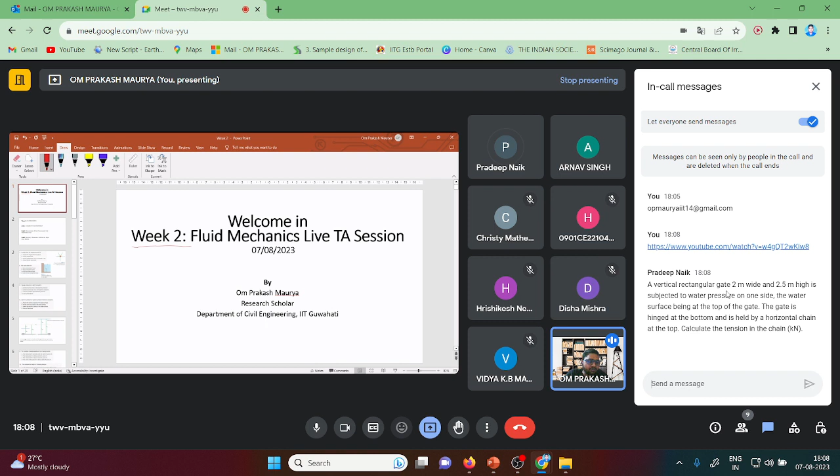Welcome all to the week 2 fluid mechanics session. The first lecture was about the concept of hydrostatics, the second lecture was about the measurement of fluid pressure and fluid hydrostatic force, and the third lecture was about buoyancy, metacenter, stability and rigid body motion. So we'll move on to the first question.

Before we move on to the first question, let me discuss some basic concepts of fluid statics. First, I want to discuss Pascal's law. Before going to Pascal's law, I want to discuss some concepts. So I think my slide is visible to all of you. Yes sir. Yeah, okay, thank you.

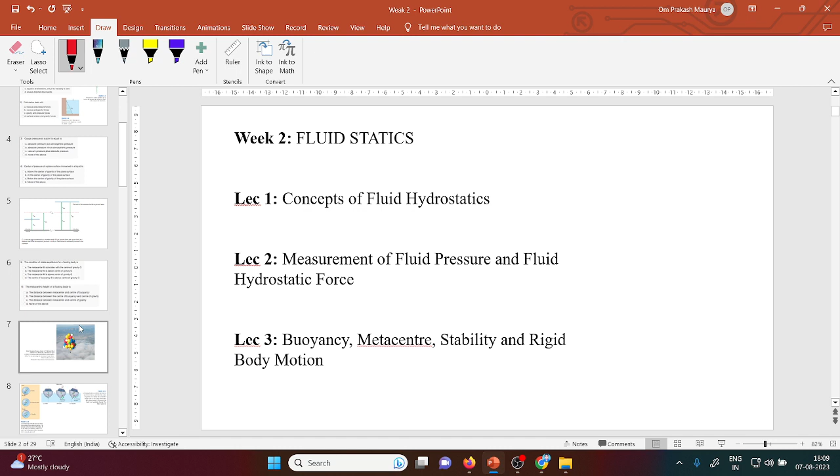I think I have given some figure about it. Yes, this figure is visible to all of you.

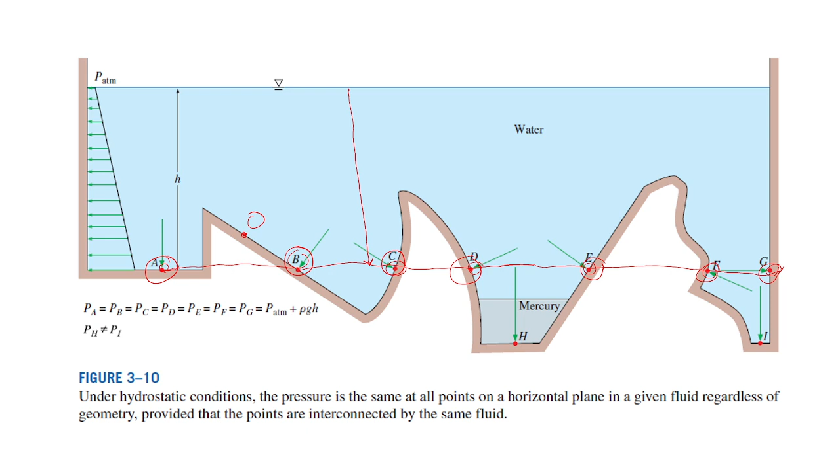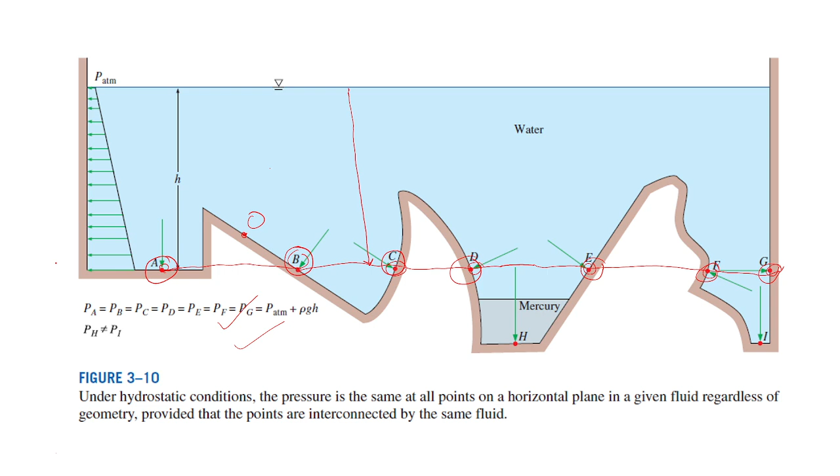Sir, your cursor is not visible. Oh, not visible. The figure is visible sir, but what you are marking is not visible. Oh, why is this happening? Wait. Now? No sir, not yet. Your cursor movement is not visible. Okay. Yes, now it's visible, point B, C. Okay, okay.

Let me put it in this mode. I think in full view mode the electronic pen is not working. So let me discuss in this mode. So point A, point B, and point C. This is very important for hydrostatics, and at the end of this concept discussion, you will get some feel about how to design these hydrostatic instruments.

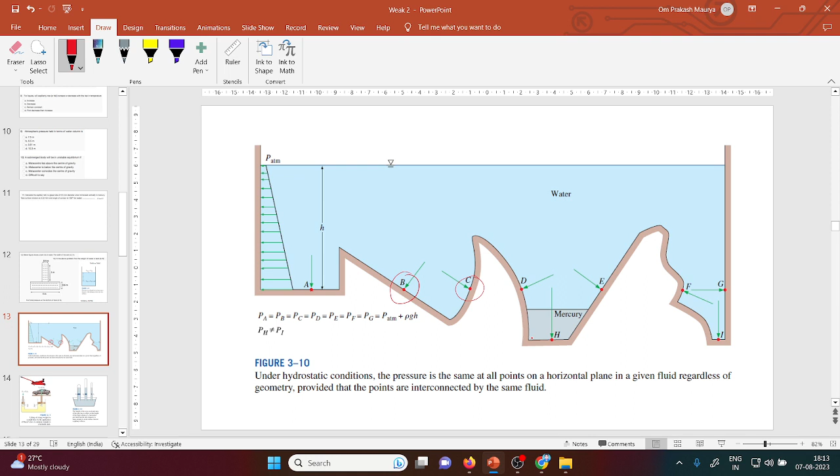So let's discuss. Point A, point B, point C, point D, point E, F, and G. These all points are in the same horizontal plane, at the same horizontal line. When you measure the pressure at point A, if you know the pressure at A, then there is no need to calculate the pressure at any point. As per the concept of hydrostatics, there is a derivation for that. Here I will not discuss the derivation. For point A, point B, point C, point D, at every point the pressure will be same, because it is the same fluid everywhere.

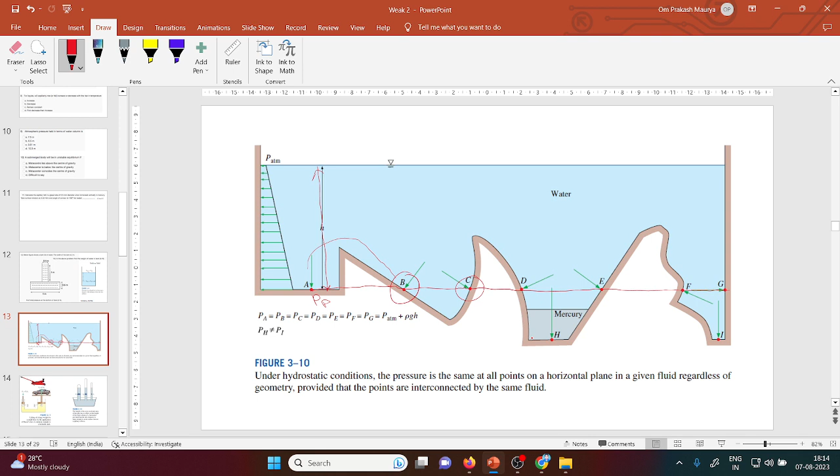But see here the below one, point H and point I. Point H and point I are at the same level, but pressure is not same, because here the fluid is mercury and here is water. So there are two conditions for pressure to be equal at two points. First, the fluid should be the same, that is the same density, and second, the points should be at the same level. So this is the main thing.

In that case sir, I will be different than F and G, is it not? Yes, here the level is different. At that level, if you draw the line, the height is that, right? Yes. But at point I, the height is different. So pressure is different. Different, yes. Right? Yes sir. Okay.

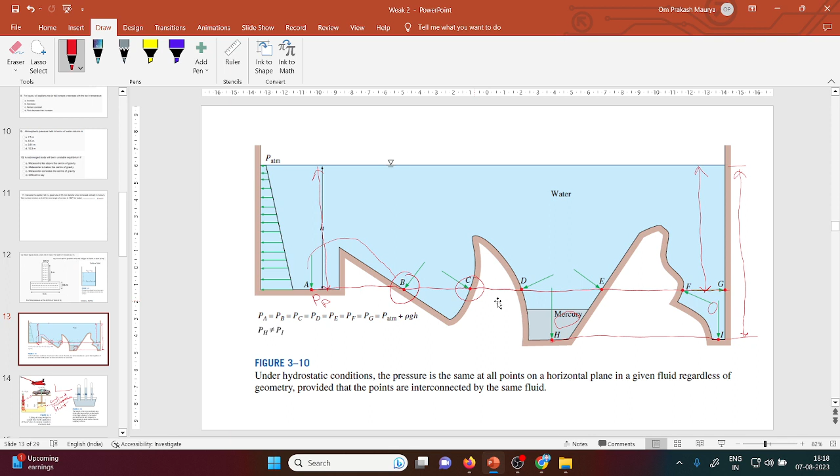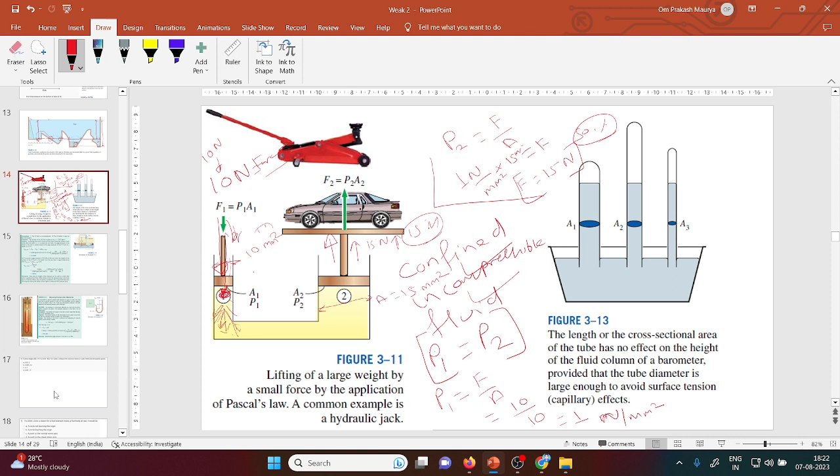Now, I don't know, and I think yeah, that is last.

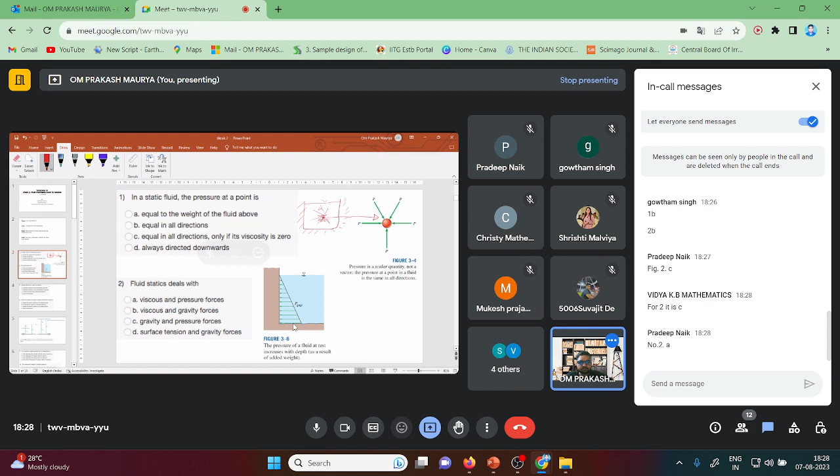Yes, now we'll discuss question number 2. I have given a figure here also, let's discuss. In fluid statics - actually someone is telling viscous, option number B is correct, someone is telling option number C is correct, the gravity and pressure force. Why? Because here we are talking about force, not viscosity - viscous force and pressure force and gravity force and tension force are the combinations given in the options. We are not talking here about viscosity. So let's consider this figure: the fluid is in a static condition, the fluid is not moving.

So there is a problem, yes, problem with the cursor. Hello, hello. Yes, oh sorry for that, I think network problem, sir you are not audible. Yeah sorry for that, I think some network problem from my side. Yes sir, audible, okay okay. Just I am sharing... yes, I think visible, my slide is visible, right? Hello? Yes, yes sir, yes yes sir, okay okay. Oh, my slide is visible to all of you? Yes. Oh but my side is not visible. Why not, okay let's discuss.

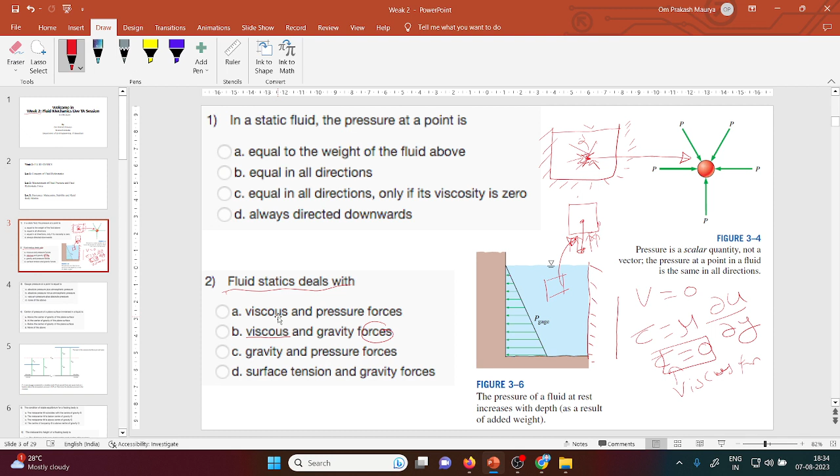Okay, let's move on to the third question. The gauge pressure at a point is equal to...

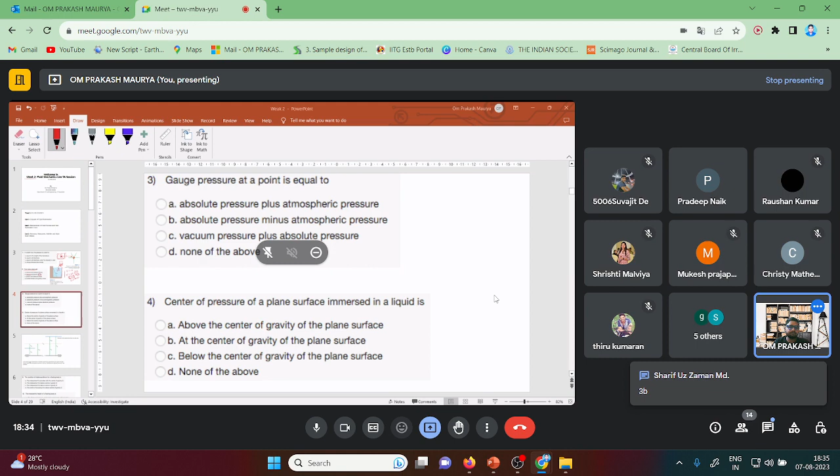For question number 3, Sharif is telling that option B is correct. Okay, let's see.

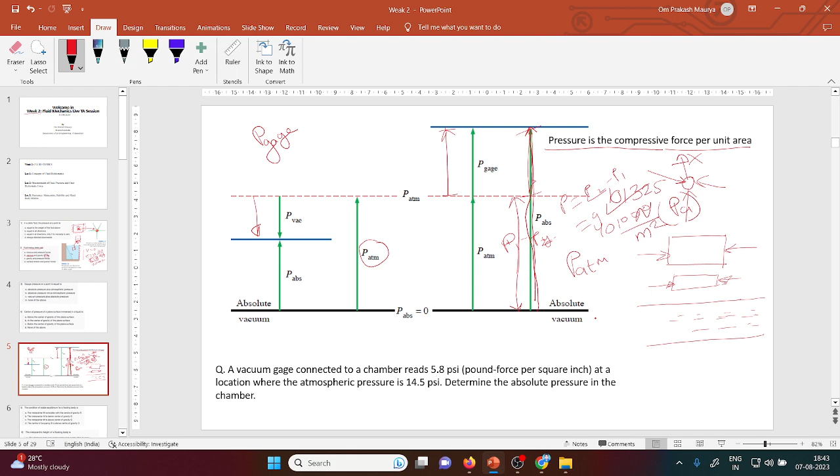Yes, your absolute pressure is from here to here, and here to here is the atmospheric pressure. Let's say this is P1 and this is P2. When you subtract, you get P2 minus P1. This quantity is the gauge pressure. With this length minus this length, you get this length easily. So the option B is correct. The absolute pressure minus atmospheric pressure.

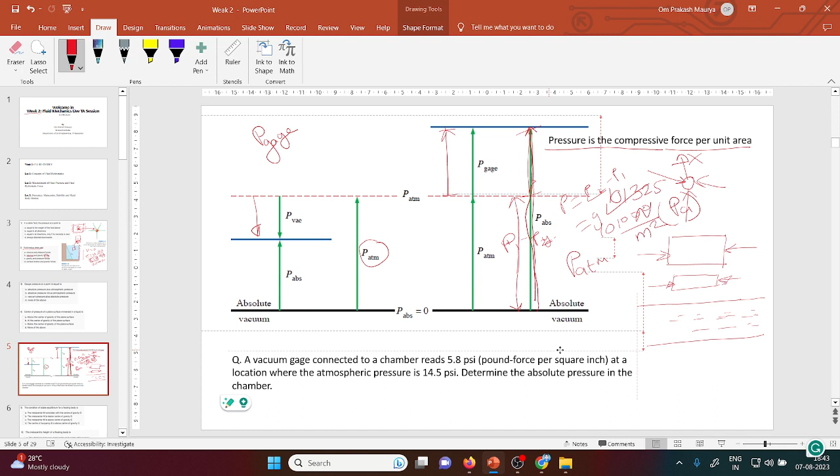One question is given based on that. Please solve this question first, then we'll go to question number 4. Is the question visible? Yes, sir. If not visible, I will increase the size. Now I think it's visible. Everyone please participate and write your answer in the chat box.

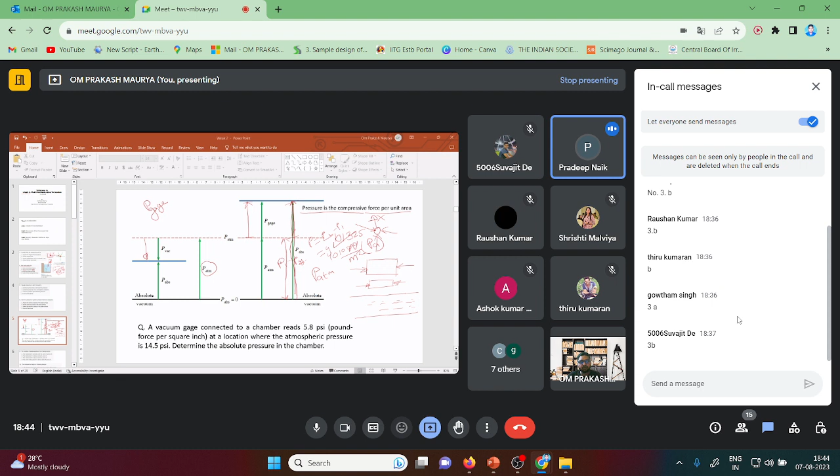The question is very simple. PSI is a unit of pressure, pound force per square inch. This is the English unit; like we use the SI unit, the English unit is also there. A vacuum gauge connected to a chamber reads 5.8 psi at a location where the atmospheric pressure is 14.5 psi. Determine the absolute pressure in the chamber.

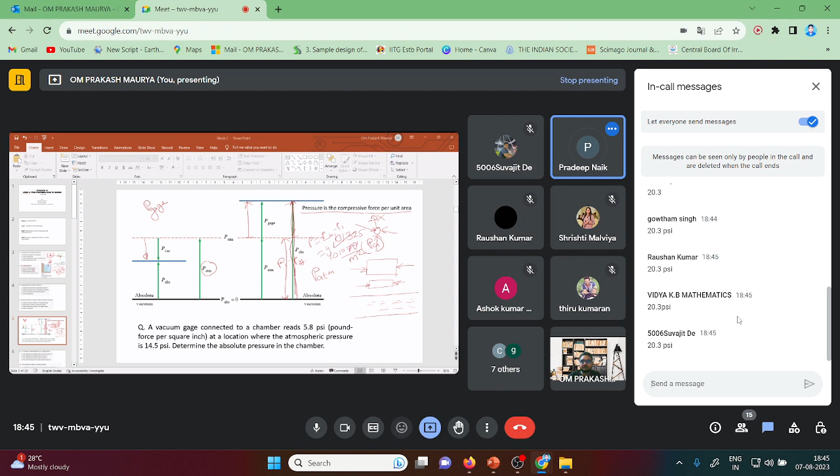Okay, 20.3. The gauge pressure is this much, and the local pressure is this much. Simply addition. Go through the figure concept I am telling you, and you can easily get it. 14.5 and 5.8, that is 20.3. Okay, fine.

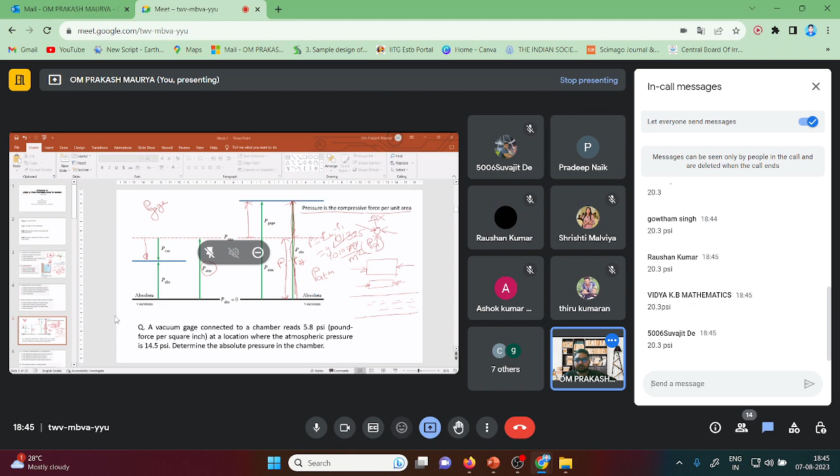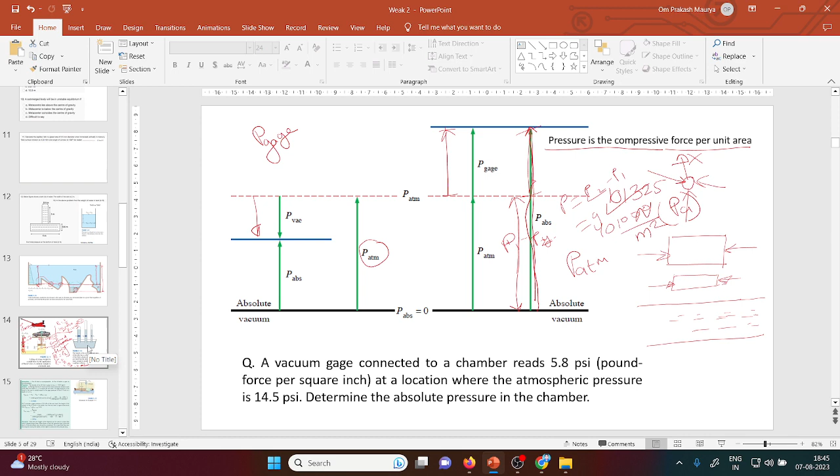Now I want to discuss some concepts about the barometer. I think the figure is visible to all of you, 3-13. The concept is the barometer. Forget about these two tubes and focus on only one tube.

Here is the atmospheric pressure, P atmospheric, and in this tube mercury, Hg, is there, and this is the vacuum part. When you put the barometer at any location, as your atmospheric pressure varies, the height of the mercury will increase or decrease. If the atmospheric pressure is lower than at another location, it will decrease; when it is higher, the mercury height will

increase. Using the concept of force balance, the gravity force balance, consider this length I am showing here. The weight, the mercury weight, is downward, and here the pressure is the atmospheric pressure, P atmospheric. So the weight is

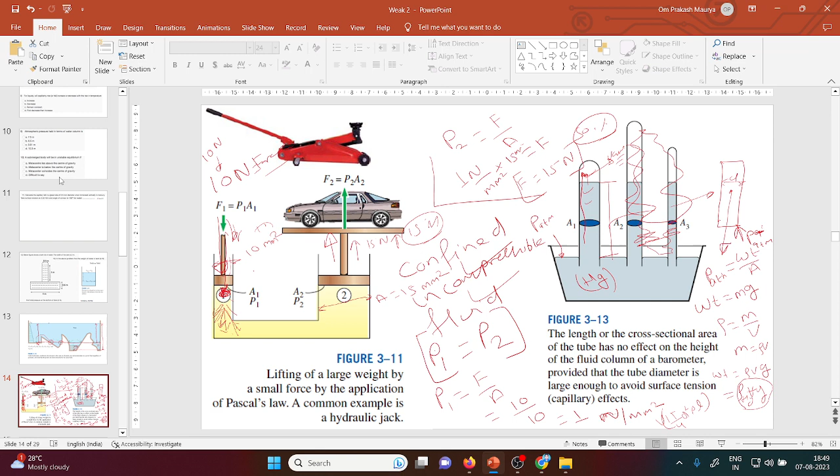With this concept, let's move on to another question. Not this. Yes, this question. Question number 4. I don't have a diagram for question number 4, but I think sir explained it very well in the lecture, so you can easily solve it. For question number 4, please everyone go through it.

Question number 4: the center of pressure of a plane surface immersed in a liquid is. It is talking about the center of pressure. As you all know, the center of pressure, center of gravity, and center of buoyancy. Option A is above the center of gravity of the plane surface. Option B is at the center of gravity of the plane surface. Someone is telling B. Option C is below the center of gravity of the plane surface, and option D, none of the above.

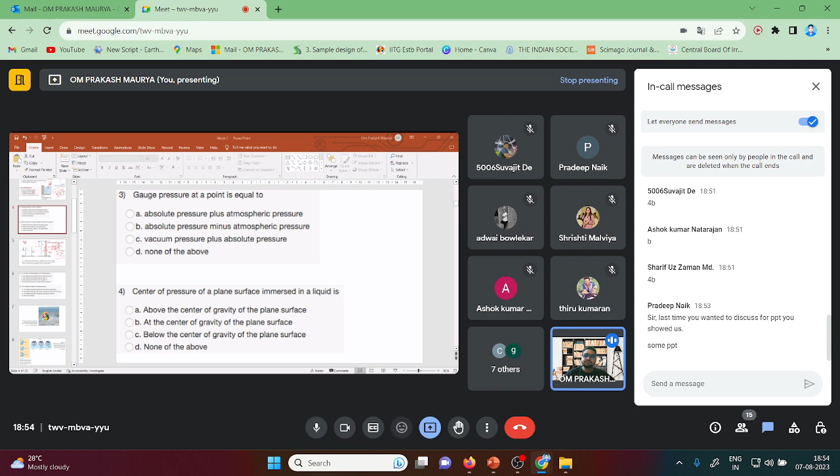No. The center of pressure is not exactly at the center of gravity. Someone is telling the answer. If fluid is there and you have immersed some body in the fluid, the center of gravity of the body is this. Let's say this is 4 meter, so the center of gravity is at 2 meter, and from here consider 1 meter, so the center of gravity from the top is 3 meter. That is G. But the question is about the center of pressure, which is how much pressure is acting on the body by the liquid. So the center of pressure is always below the center of gravity.

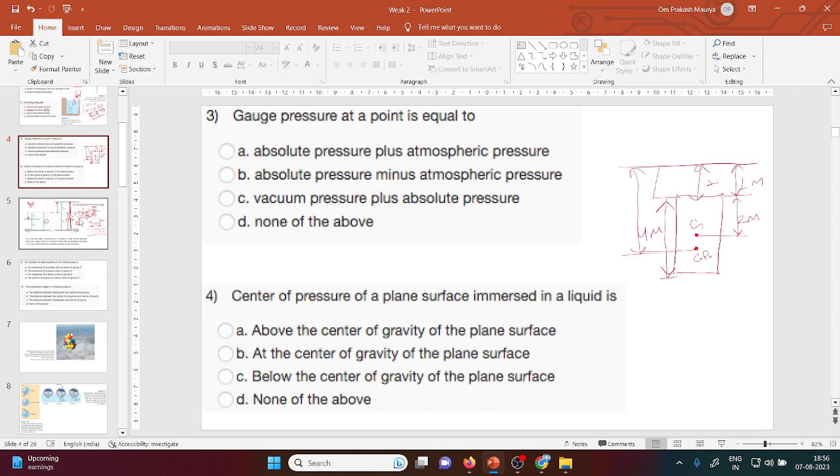For detailed knowledge, please follow the NPTEL lecture. You will definitely get some visualization of how the center of pressure is below the center of gravity. This is the center of pressure. Center of pressure is always below the center of gravity. So this question is discussed, and this one is also discussed. Question number 5.

Some metacentric height. Before question number 5, let's discuss some concept, then we'll go for questions 5 and 6. So what is metacentric height? Not metacentric height; here I want to discuss the buoyancy force. My slide is visible, I think? Yes, sir. Okay. You see someone hanging with these helium balloons in the atmosphere. This guy is hanging through the balloons. How? Only because of the buoyancy force acting on him.

Here is the description of what I was telling, but now come to that part. Let's consider one pond, a water pond, and this is the log. One dry log. Log means a piece of wood, and this one is the wet. When you throw both in this liquid, what will happen? The wet will sink completely, and the dry one will not sink completely.

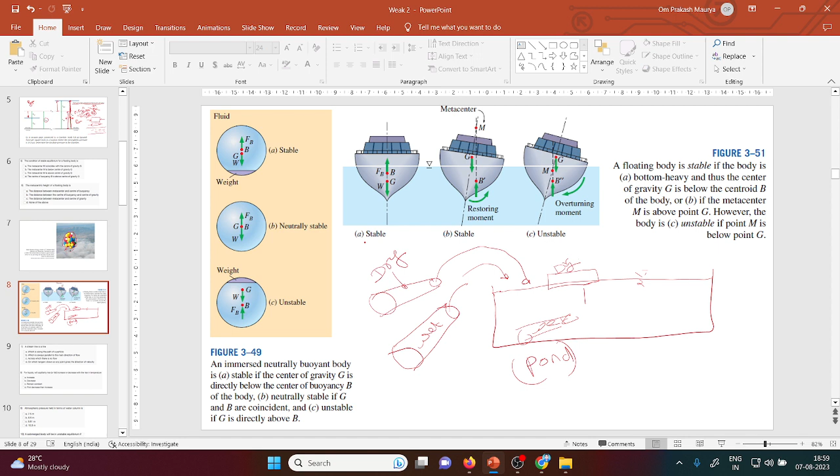Why? Because buoyancy force is acting, and the area, or you can say the volume, of both logs was same. Let's say volume is V meter cube. Volume of both logs was same. So the buoyancy force acting on that log and on that log will be same because the area will be same, but the density of your wet log is more as compared to the density of the dry one.

So what will happen? What is the density? M by V. Mass is how much? Rho V. And weight is how much? Rho Vg. Okay, rho Vg. When you just compare from here, rho of wet log is more as compared to rho of dry. So weight of dry log is less as compared to the weight of your wet log.

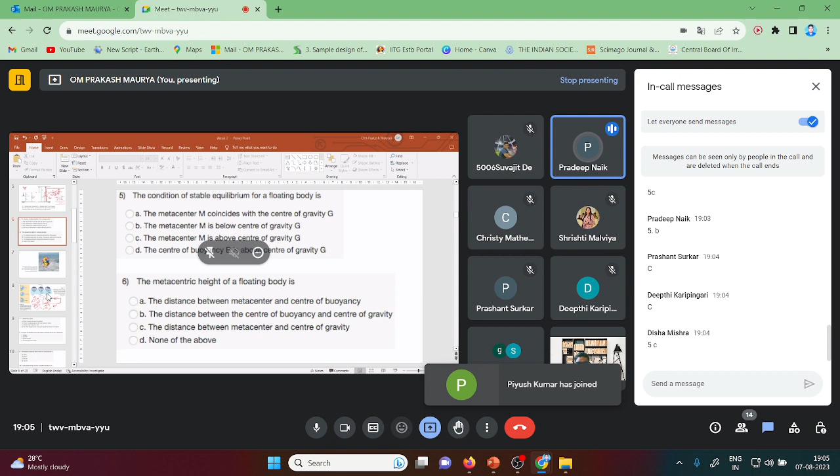Sir, can you please explain a little bit? Can you repeat that explanation you gave last time? Which one? The previous slide, sir. You were explaining what is metacenter and all. Yes, yes. Okay. Let's move to the PPT mode. Here the figure is given, figures A and B.

Yes, sir. You just see figure B, the metacenter here. This is figure B, the stable condition. The metacenter is here and your center of gravity is here. So for stable, the metacenter should be above the center of gravity. And in the unstable condition, your metacenter is below the center of gravity. I think it's visible to you, right? Yes. And the reason why the metacenter is above in the stable condition and below in the unstable condition,

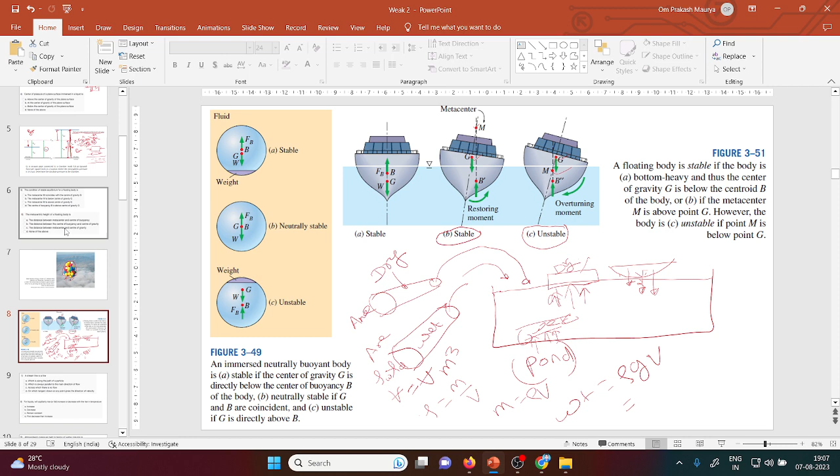Yes. Option C is correct. The metacentric height of a floating body is: the distance between the metacenter and the center of buoyancy, the distance between the center of buoyancy and the center of gravity, the distance between the metacenter and the center of gravity, and option D is none of the above. For this question, please everyone write the answer in the chat box.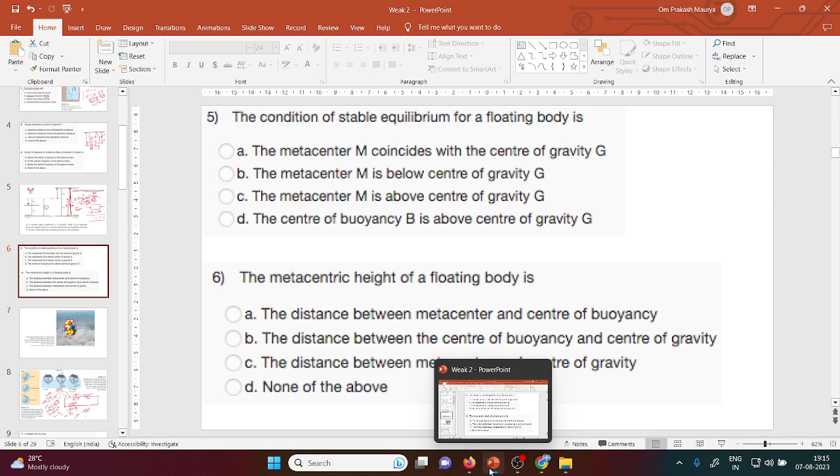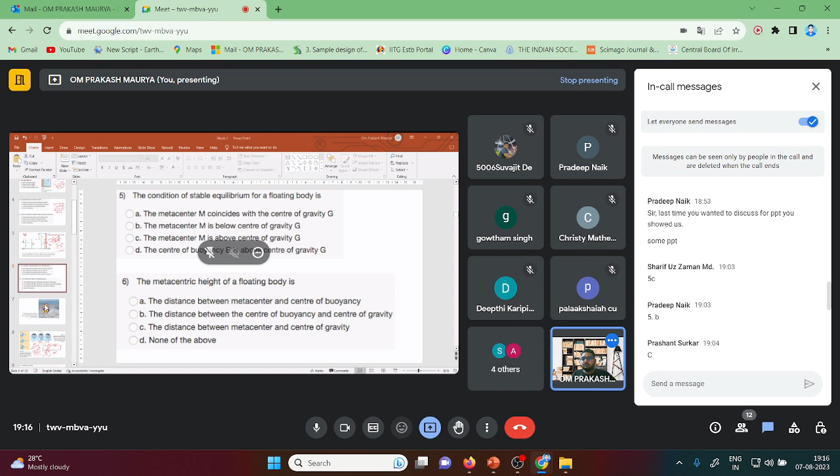Yes, for question number 6, option C is correct. Okay, this concept we have discussed, and this one also. Before going on to the above question, let's first discuss question number 9 and 10.

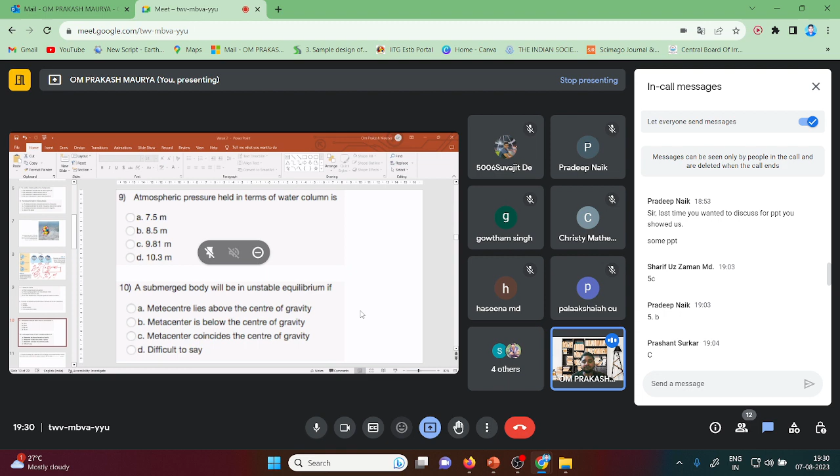Yes, am I audible? Please anyone tell. Yes, sir, audible. Okay. Are you solving the question? Okay, now I want to discuss the answer. No problem. I want to discuss on the new slide.

The question is telling this. You have a barometer with mercury, like here.

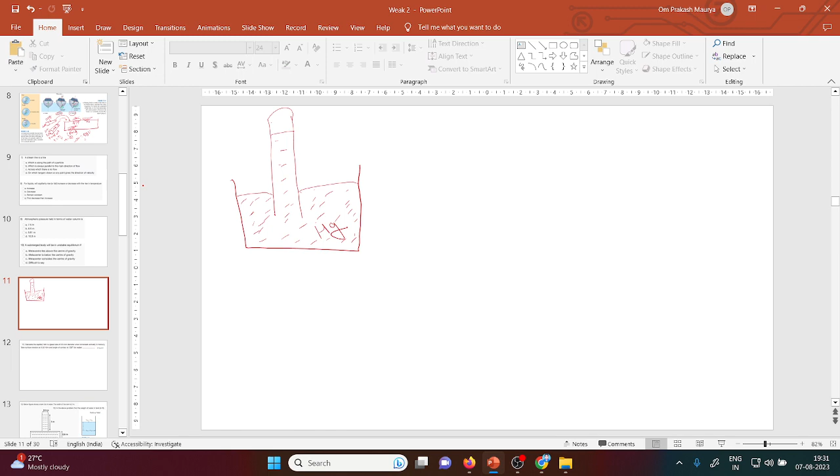Is the figure visible to all of you? Yes, anyone please tell. Is what I am drawing visible? Hello? Network problem. What is happening? Yeah, I think I have lost my connection, so sorry for that. Now I am sharing. I don't know what is happening today. Okay, now I think whatever I have drawn is visible. Yes, sir.

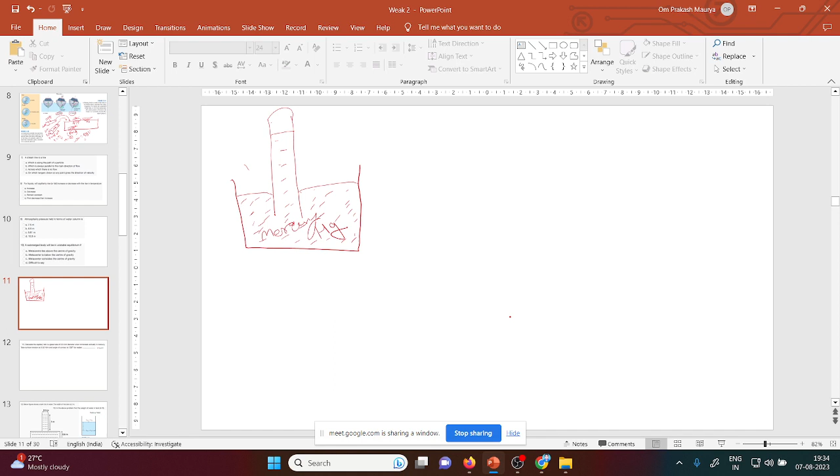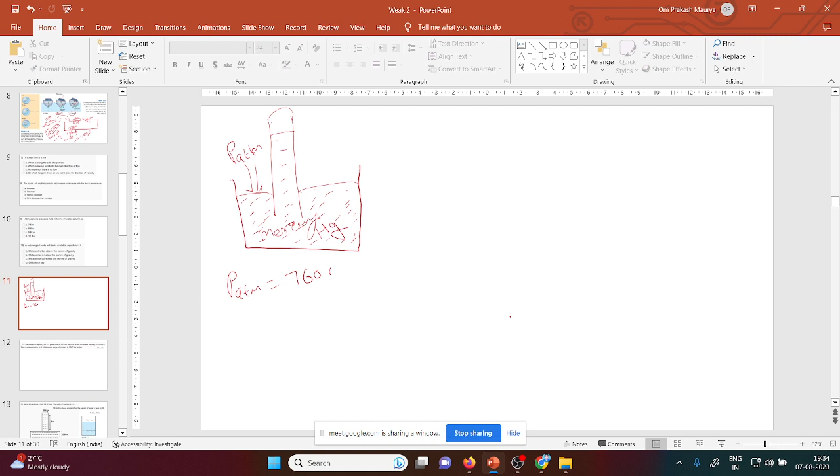Okay. The question is that you are using the barometer for measuring P atmospheric at the same location, not another location. And you already know P atmospheric in terms of mercury is 760 mm of Hg. And the density of Hg you know, very common, in kg per meter cube. The question is, when you use water in place of mercury, what will happen? This height here is 760 mm, in mm, not meter.

When you use water at the same location, let's say I am measuring in Guwahati where I am staying, the same barometer instrument at the same location but with water. How much is the height of the water, will it decrease or increase, or what will happen? Let's see. This is closed. Then what is the height of this? Here also the atmospheric pressure is acting. This height is water, H2O. Rho of H2O you all know is 1000 kg per meter cube. The question is asking what is the H value.

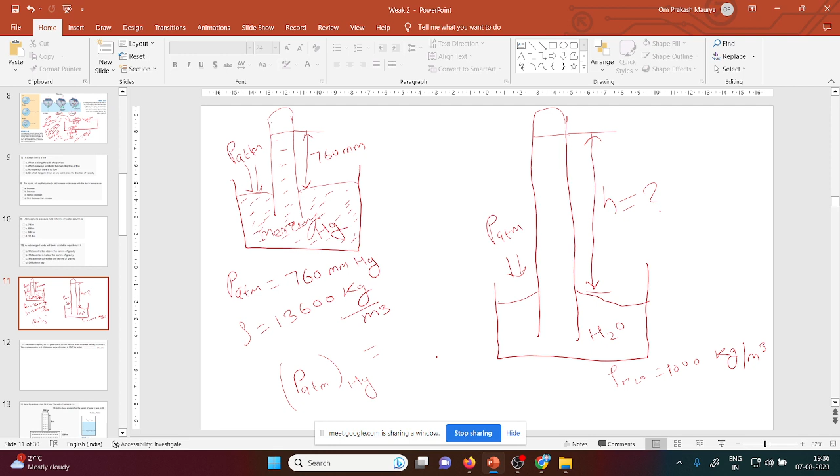P atmospheric with Hg. Why am I equating both? Because at the same location you are measuring only P atmospheric, not another pressure. Using water and mercury, the pressure is equal. Obviously, whatever atmospheric pressure you are measuring with oil, water and mercury, the pressure will be the same every time with any fluid.

So what is the formula here? The pressure formula, as discussed earlier, for this column is rho g h. This is the pressure downward, and this is the atmospheric pressure. So rho of mercury into g into h equals rho of water into g into the height. Here I am putting capital H. Your given value is 760 mm.

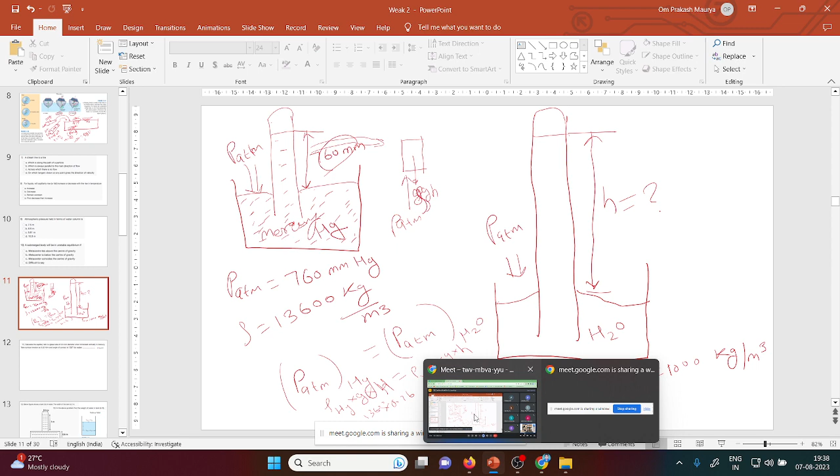You put here 760 in meter, 0.76, g cancels out on both sides, and the density of mercury is 13600, equal to water density 1000 into g, which cancels out, and H. When you calculate H, how much are you getting? Anyone tell? Please solve using a calculator and write the answer.

This is a very basic concept. Only the force balance, only the weight and atmospheric pressure balance. Whatever we discussed earlier in fluid statics, we discussed only the gravity force, the downward force exerted by the liquid or gas, and the pressure balance. Now, how much are you getting? Please, anyone write in the chat box.

Here, h is equal to 13600 into 0.76 divided by 1000. That is 13.6 into 0.76. Let's calculate 13.6 into 0.76. Not 13, it's 10.336. Just say 10.3. 10.3 meter of H2O.

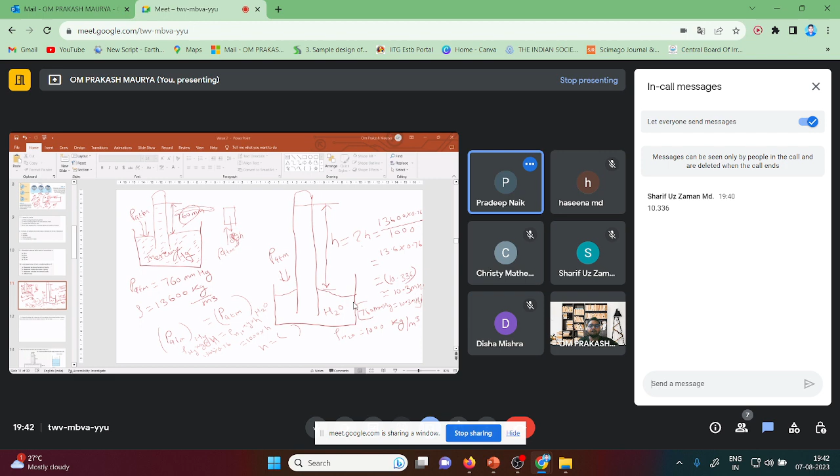Okay, now let's move on to the next question. Below question, you just read and solve. I have some problems in the last part - you just take a screenshot of the question and solve it.

It will enhance your understanding about hydrostatics. I have lots of problems, so you just take the screenshot. I will show you.

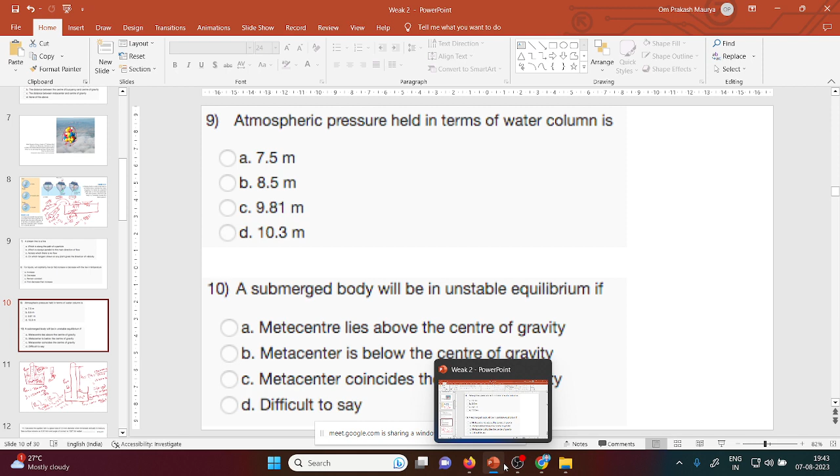Question number 10. Please solve question number 10. A submerged body will be - for question number 10, option A is correct, Pradeep is telling. Okay, another one, please also give your answer in the chat box.

A submerged body will be in unstable equilibrium if metacenter lies above the center of gravity, or is this the same? No, here we're talking about the submerged body, not floating body. In case of floating body, we discussed about the metacentric height, but here the question is asking something different.

Submerged body will be in unstable equilibrium if metacenter lies above the center of gravity, metacenter is below the center of gravity, metacenter coincides with the center of gravity, or it's difficult to say.

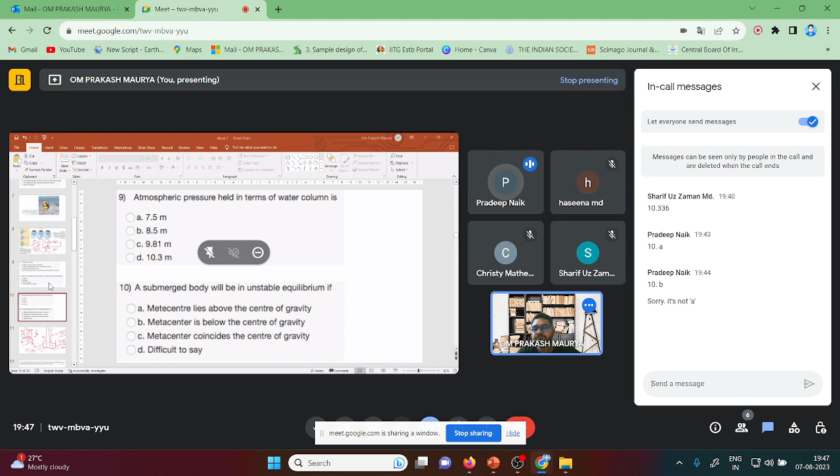Yes, question number 7 and 8. Please go through questions 7 and 8. A streamline is a line - option A, which is along the path of particle. Option B, which is always parallel to the main direction of flow. Option C, across which there is no flow. Option D, on which the tangent drawn at any point gives the direction of velocity.

Question number 7. The streamline - I think you have already seen the videos. I think this streamline question is not related to hydrostatics, it's related to fluid kinematics. But in the previous year this question was included in hydrostatics. So let's solve it, okay.

Pradeep is telling option A is correct. Anyone else? Okay, Sharif is telling option D is correct. Okay, let's discuss. I will give some concept here also.

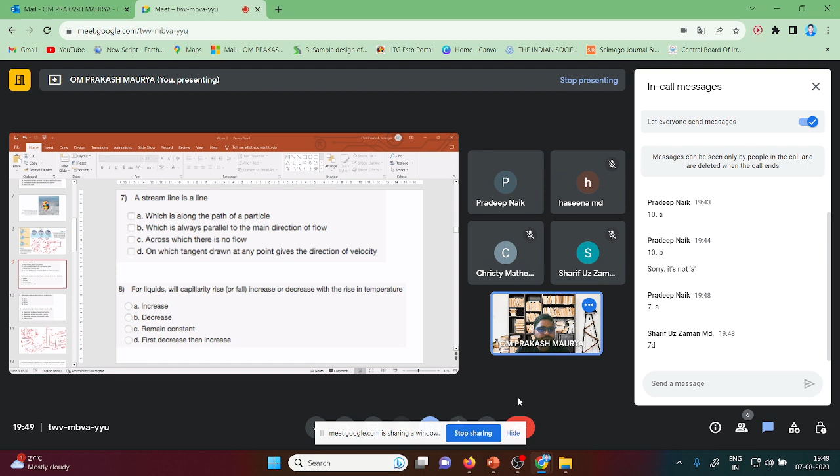What is a streamline, path line, and a streak line? I will discuss all three lines. This discussion I will also do in fluid kinematics. Okay, let's discuss what is a streamline.

Let's consider a body, and fluid is flowing like that. This is the path of the fluid, so this line is known as the streamline. You take one line here and just visualize it.

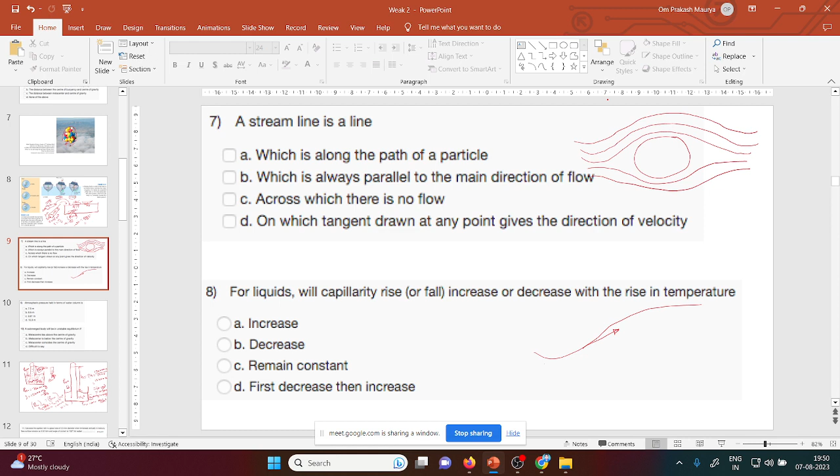When you draw the tangent, this gives the velocity vector. At any point you draw a tangent, this line gives you the velocity vector. So option D is correct - streamline is a line on which the tangent drawn at any point gives the direction of velocity. Option D is correct.

Streamline, path line, and streak line - I will discuss in the coming session, not here. This is not relevant here because this is fluid statics. Question number 8.

For a liquid, will capillary rise or fall, increase or decrease with the rise in temperature? This is also a very important question, a very conceptual question. Yes, please attempt this question.

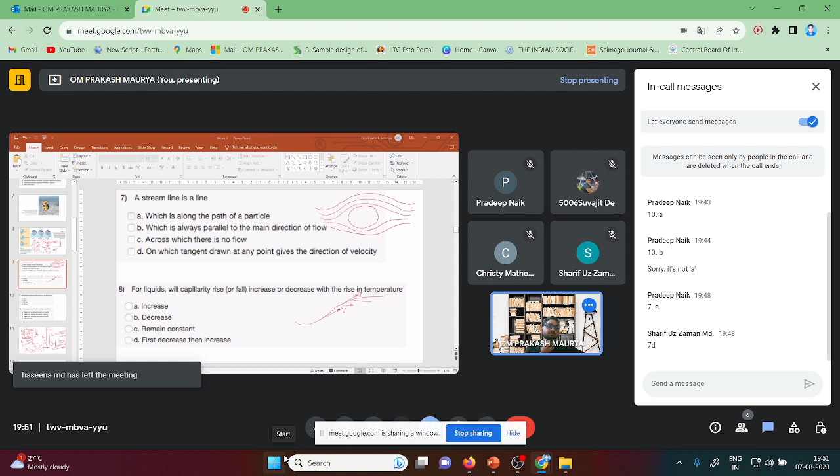For question number 8, for a liquid - okay, with this question we'll finish today's session.

And in the last part, I have lots of questions. Whoever has joined, you just take a screenshot of the question, and if you have any doubt, we'll discuss it in the coming class.

For question number 10 - okay, Sharif is telling, could you please mention the correct answer of question number 10? Okay Sharif, I will tell the answer for question number 10 in the coming class because I also have doubt in question number 10. I think there's some typing mistake or something. I will discuss with my professor and also go through the log book, then I will discuss it.

Question number 10. For question 8, okay you're telling option D. Let's see, option D or another option, which one is correct. Let's see.

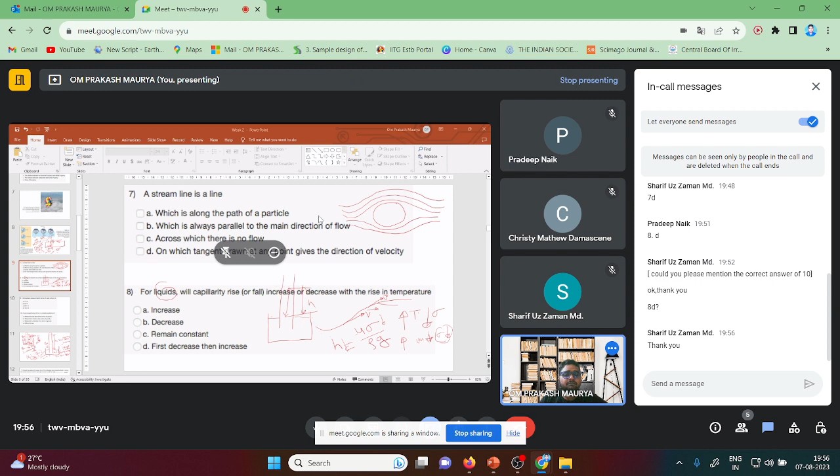So we have discussed 10 questions. Now question number 11 is visible. If anyone, please tell about question number 11. Hello? Hello? Yes sir, visible. Okay, you want the screenshot of question number? All questions? Yes sir, we want. Okay, if you want, then I will show.

No problem, yes, I will put it in full view mode. You take the screenshot. Oh, it's done for 11. For question number 11, yes, screenshot done. Okay, for question number 12, you can also take.

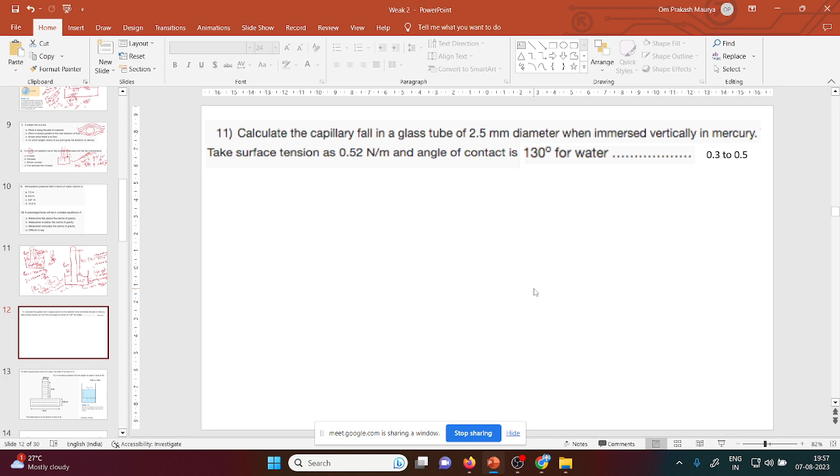For question number 12 and 13. 12 is not coming, sir. Not visible. No. Oh, what is happening? I think some network issue today. Now visible. Yes, okay, you take the screenshot.

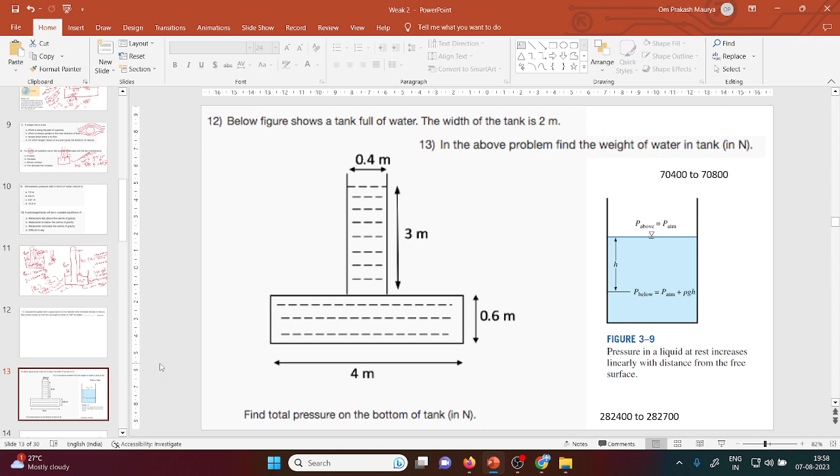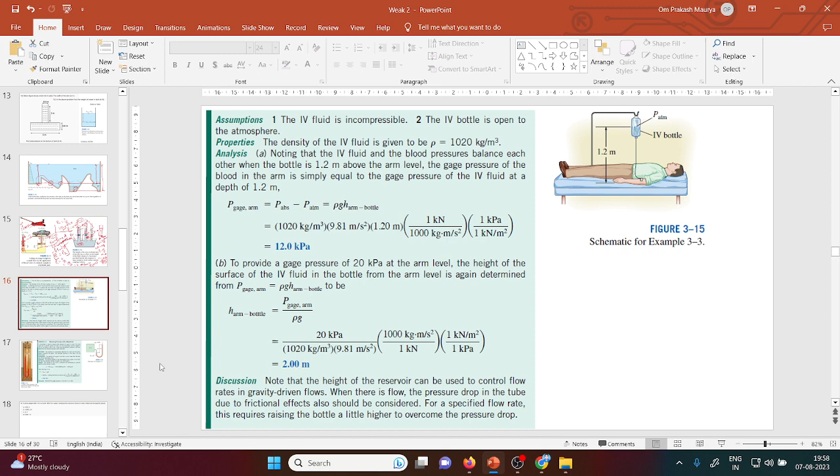Question number 12, then question number, oh here I have this. Okay, this question, this is problem solving only. You can take and see how we can solve the question step by step. When you solve the question, then you feel confident in any particular subject. Now coming on the question number, this is the example question only.

The pressure measuring with the manometer, and here some U-tube manometer. You can see the pictorial representation of U-tube, how it looks like the U-tube, not U-tube manometer.

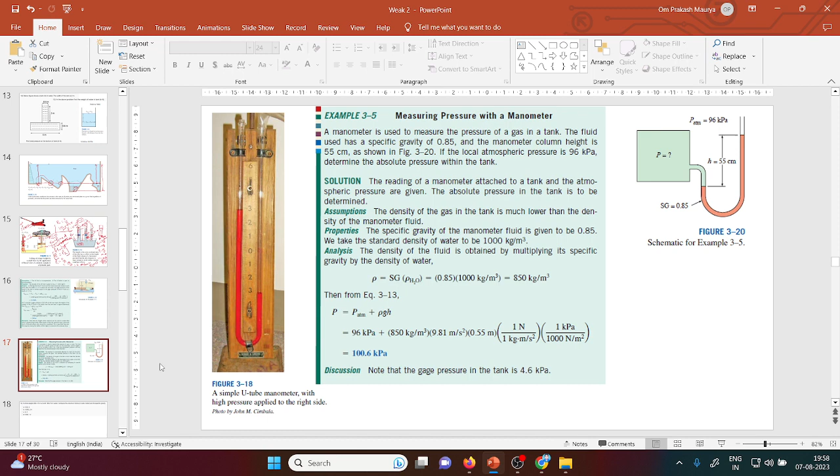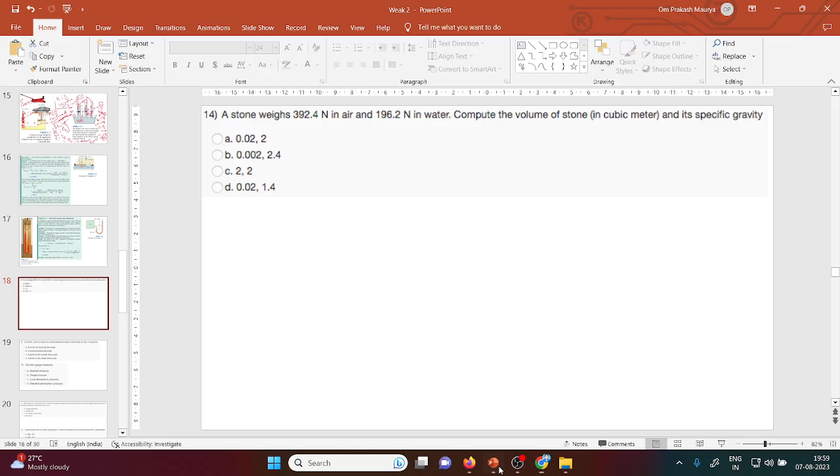Now question number 14, you can also take that, it's done. Hello. Yes sir. Okay, for question number 14, and okay, that is done. And I think a similar question is given in the second sheet.

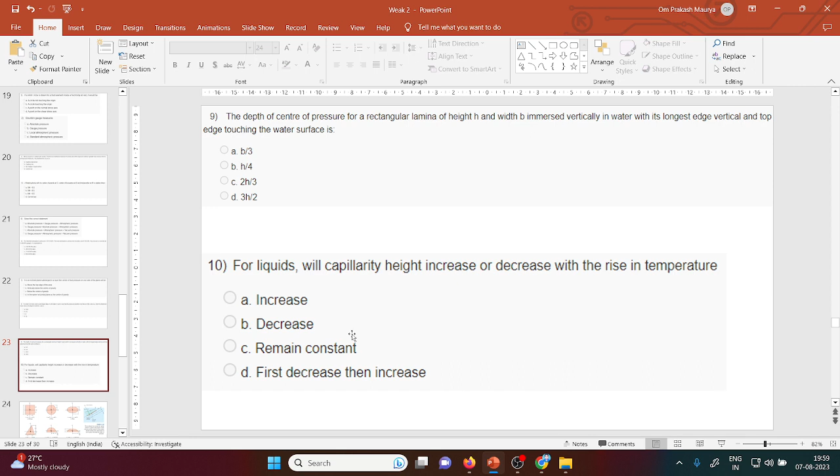So that, already I have told about what is absolute pressure and this, so no need to take the screenshot of these questions. Already we have discussed, some formula is there. If you want to take it, you can take it. This will help in your problem solving.

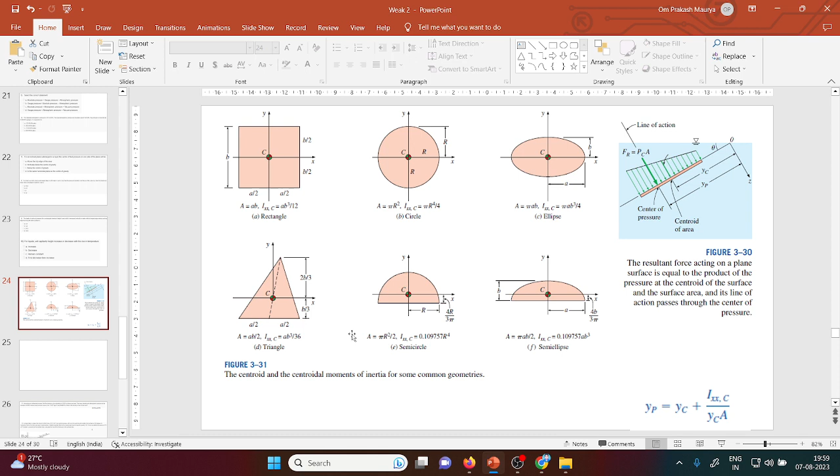And why metacentric height is high, metacenter that is the center point is more as compared to the center of gravity. Here the below formula, I think you can see, right? This one. Yes, okay, this yp represents the center of pressure point and yc represents the center of gravity.

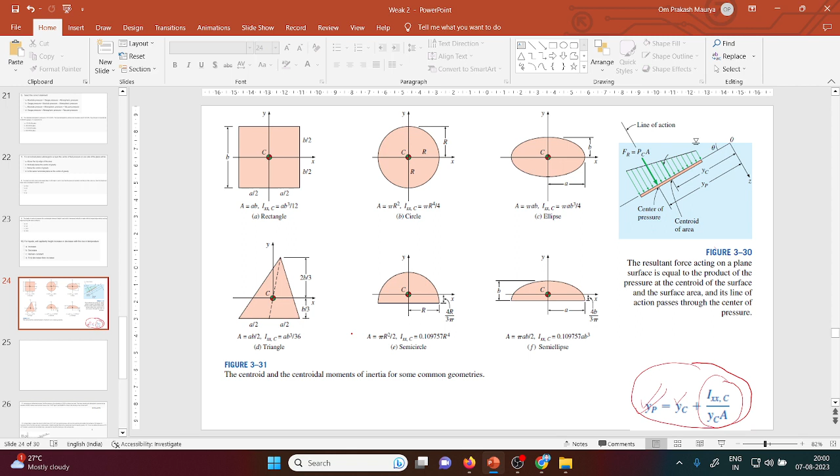So this additional term is included when you account for, when you calculate the center of gravity. This additional thing will increase the depth of the center of pressure. Okay, some question is also there if you want to take the new questions. Now this is also a very important question, you can take it.

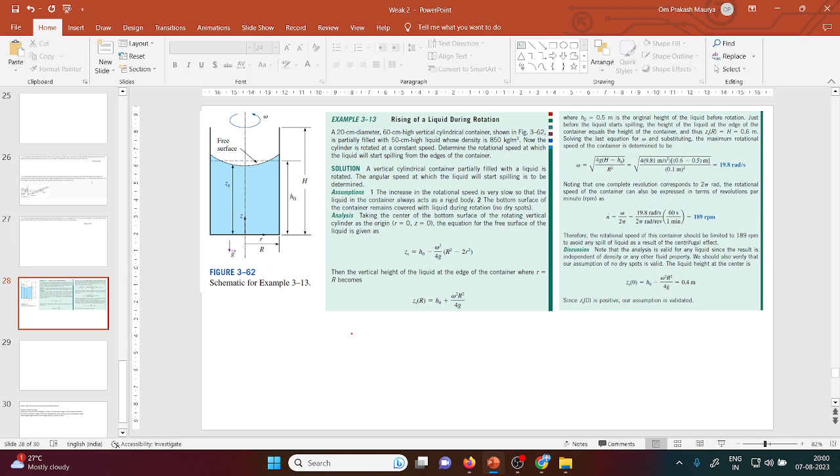These questions you solve, definitely these questions will also help in your final exam, in your university, or also in the NPTEL final exam. Okay, done.